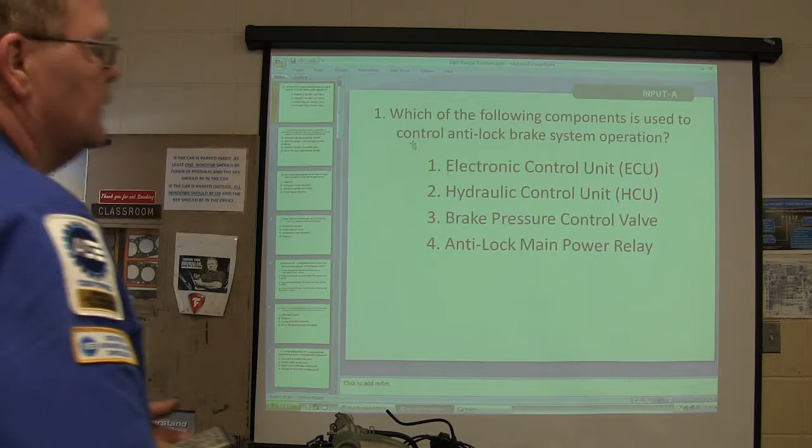Friday? Next Friday? This coming Friday? Yeah. All right, let's see what we can do here.

See how you guys are gonna do on this test. Now, we've already talked a little bit about ABS, so you shouldn't really have a problem with this. You ought to be able to blow right through it without a bit of a problem at all.

Which of the following components is used to control anti-lock brake system operation? Think about it, answer the question, and don't whine, okay? Which of the following components is used to control anti-lock brake system operation? Electronic control unit, hydraulic control unit, brake pressure control valve, or the anti-lock main power relay? Now, if you were paying attention during the previous discussions we had about ABS, you would know these.

I think you mean A, B, C, D instead of 1, 2, 3, 4? Either way works, you know how to make it happen. You got that answer sheet says A, B, C, D, you know, so.

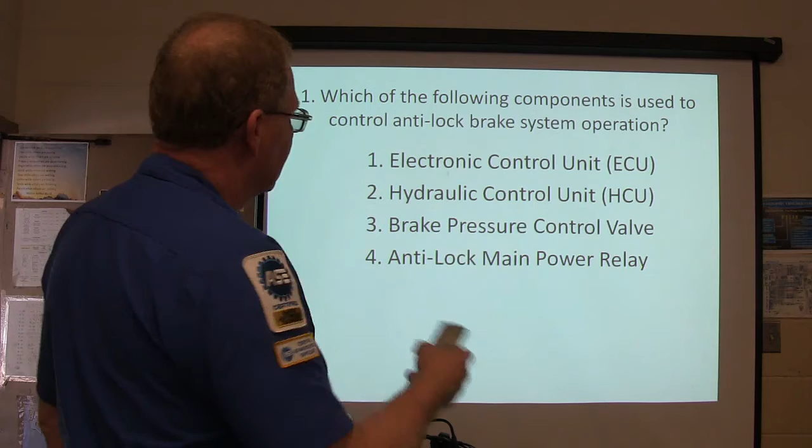All right, an anti-lock brake system prevents wheel lockup by controlling the brake pressure during an emergency stop. By not locking the wheels during hard braking, the driver can do what? A, maintain vehicle directional control. B, stop the vehicle in the shortest possible distance. C, maintain traction during the stop. Or D, all of the above answers are correct.

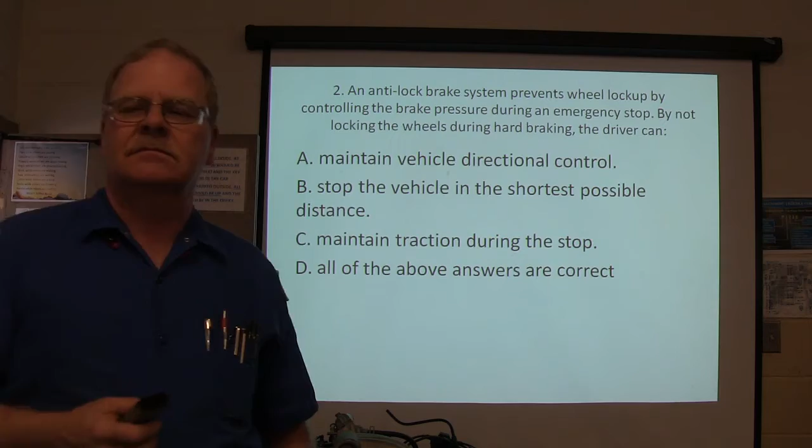We have people that came without pens today, and they have to pass a pen back and forth. Never go to work without a pen. I'm a team player, sir, I share.

When the brakes are applied hard enough to cause a lockup situation, the ECU sends signals to what? The reservoir, the pump and motor assembly, the hydraulic control unit, or wheel speed sensors.

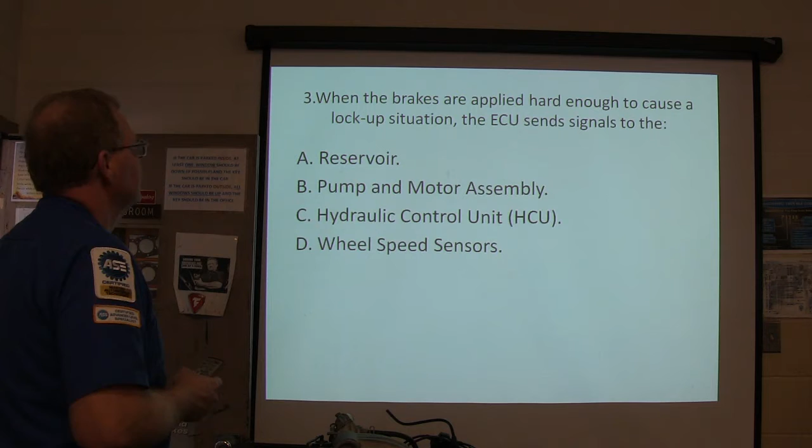Which ABS component is used to cut off fluid flow from the master cylinder to the brake? Outlet dump valve, inlet isolation valve, pump and motor assembly, or reservoir?

Are you a clear thinker? You said.

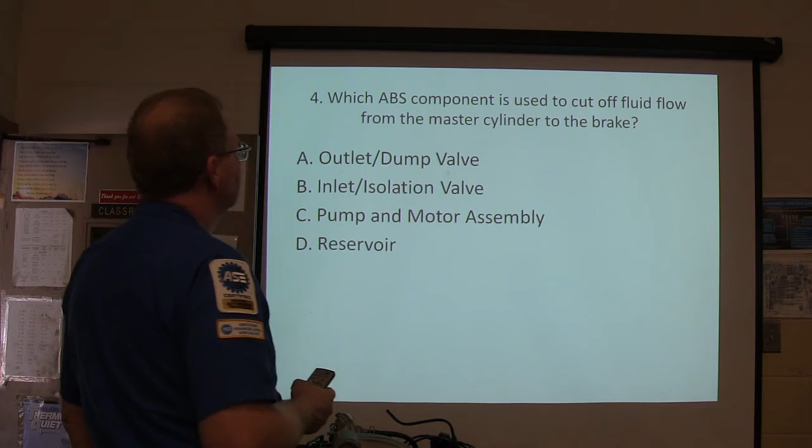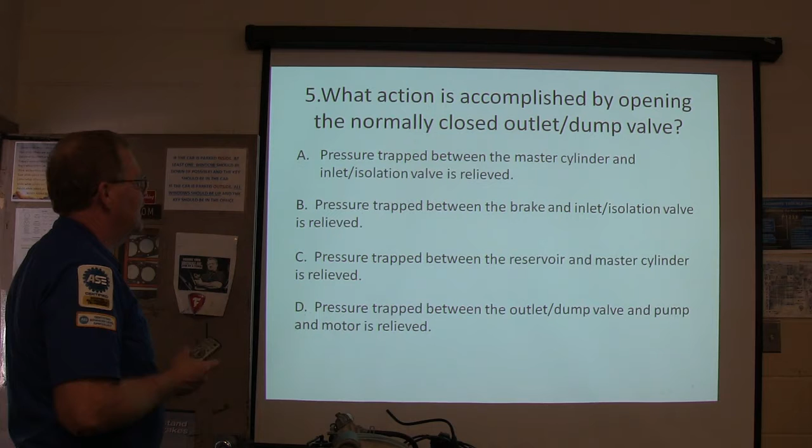What action is accomplished by opening the normally closed outlet/dump valve? Pressure trapped between the master cylinder and inlet isolation valve is relieved. Pressure trapped between the brake and inlet isolation valve is relieved. Pressure trapped between the reservoir and the master cylinder is relieved. Or pressure trapped between the outlet dump valve and pump motor is relieved.

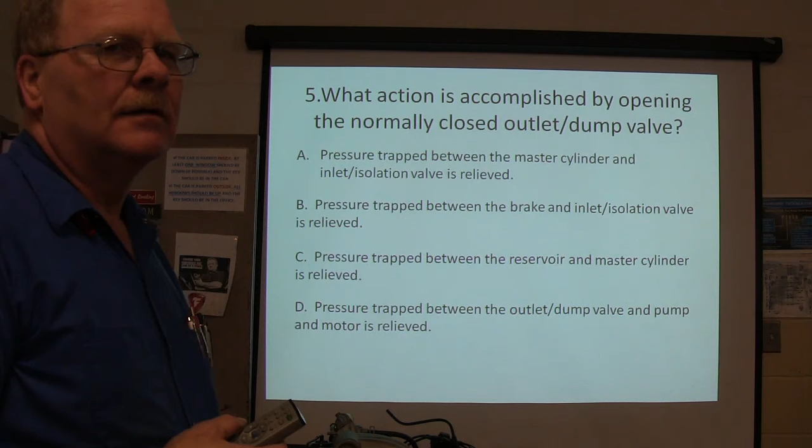That's confusing. Yeah, it is.

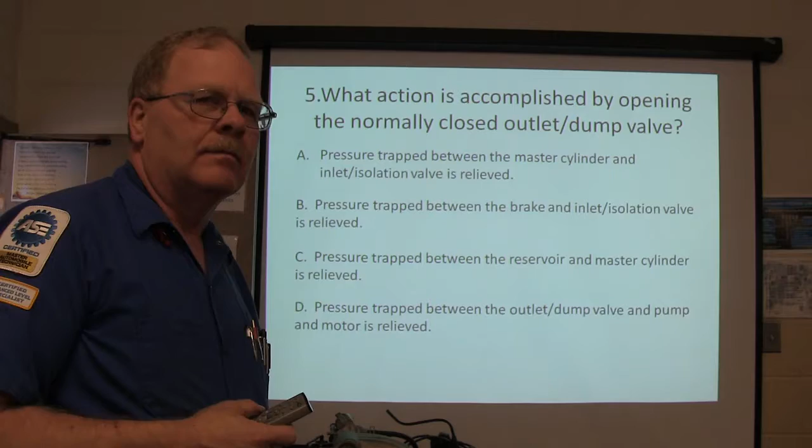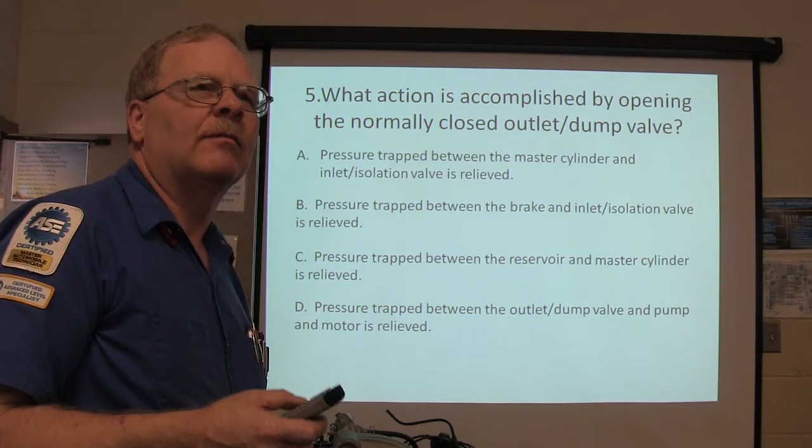I took the ASE brakes test this time around again, don't be scared for me. The fourth time. Over the past 25 years I took it, oh heck, I guess this is the fifth time, because I've re-upped. No, I've re-upped 4 times after I took it once. But anyway, this is a cakewalk. Okay, I didn't get this from the ASE test because you're not allowed to, right?

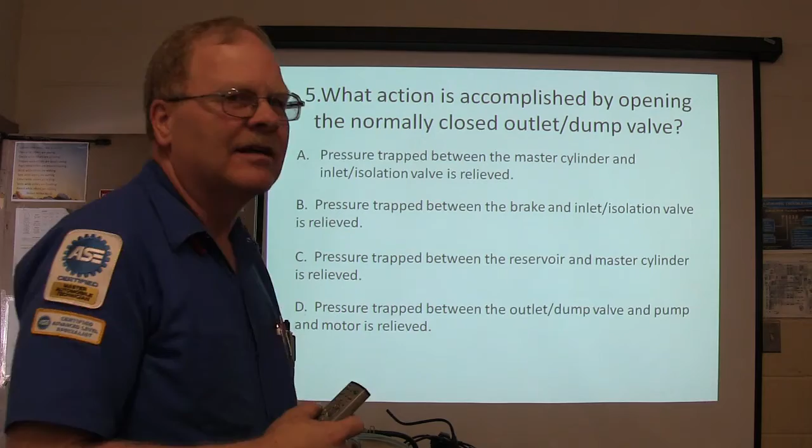But anyway, which of the following components are used to replenish the brake fluid in the ABS circuits after a dump occurs? Pedal switch, reservoir, pump and motor assembly.

Now, I didn't write these questions, they came from somewhere else. So if you disagree with any of these, we'll just have to take it up with the person who wrote it. I disagree with that one. I do too. I disagree with that question. You resemble that remark? Okay.

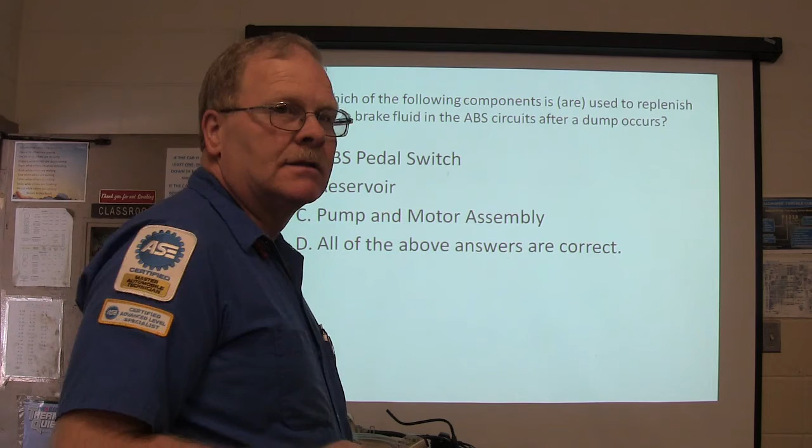Ready? Which ABS component is responsible for actuating pump and motor assembly operations? What do you think?

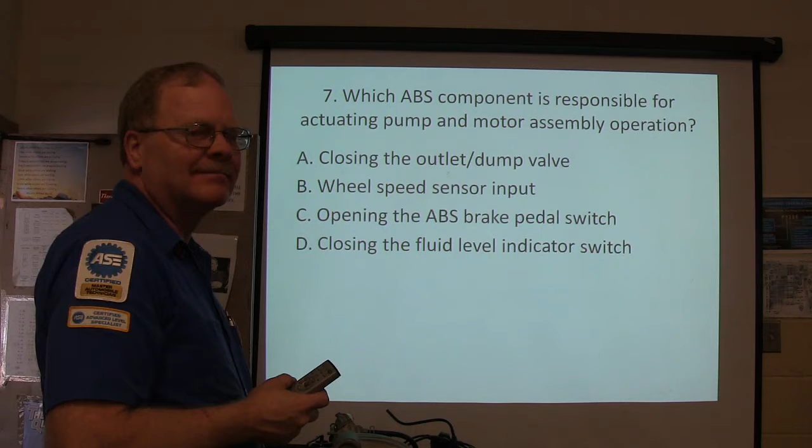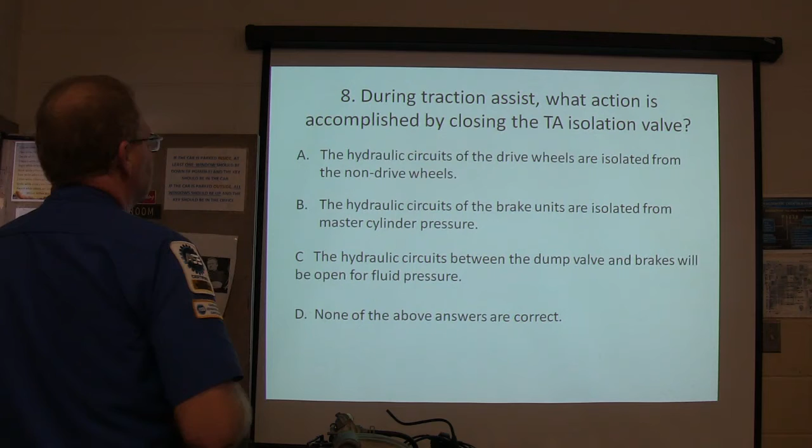During traction assist, what action is accomplished by closing the traction assist isolation valve? The hydraulic circuits of the drive wheels are isolated from the non-drive wheels. Hydraulic circuits of brake units are isolated from the master cylinder pressure. The hydraulic circuits between the dump valve and the brakes will be open for fluid pressure. Or D, none of the above answers are correct.

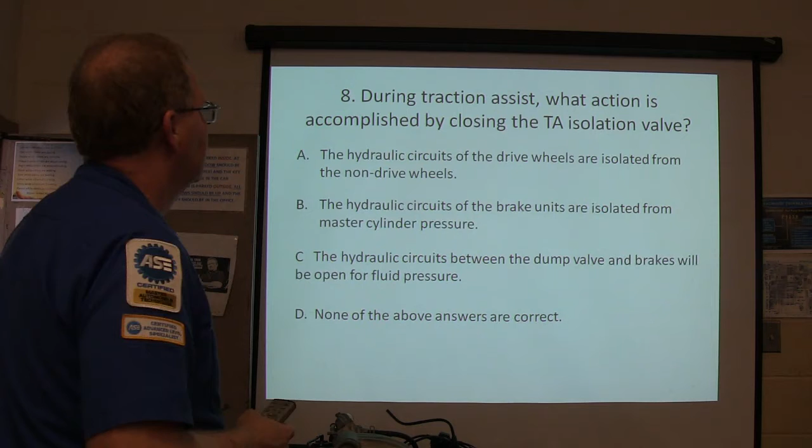Ready to move on? On most vehicles, when the brake fluid reservoir fluid level switch is activated: A, the red brake light is illuminated. B, the yellow brake light is illuminated. C, the ABS system goes offline. Or D, all of the above are correct.

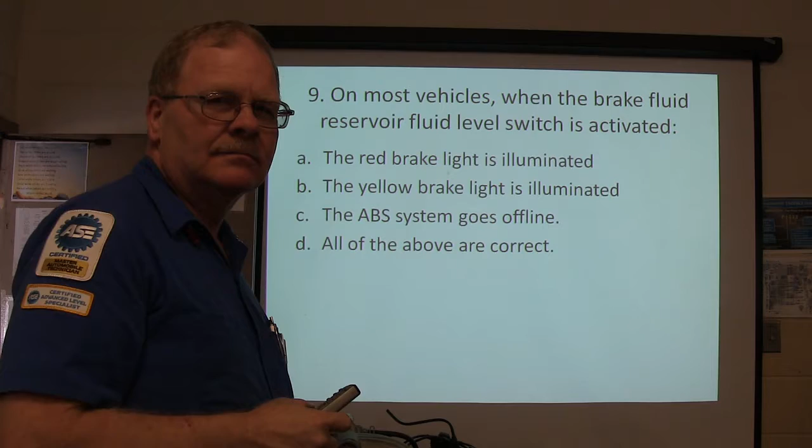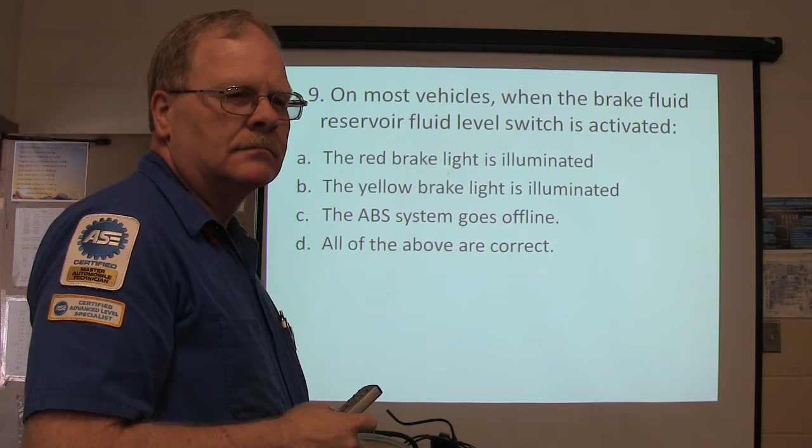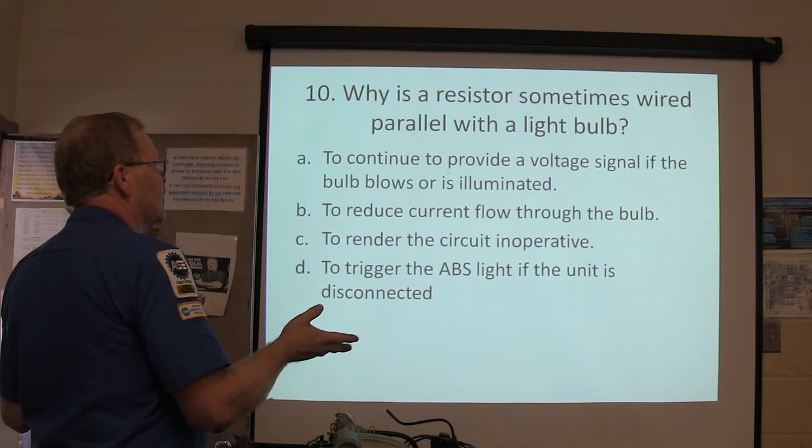Why is a resistor sometimes wired parallel with a light bulb? To continue to provide a voltage signal if the bulb burns out, to reduce current flow through the bulb, to render the circuit inoperative, or to trigger the ABS light if the unit is disconnected.

Oh, this test is going so horribly.

Yeah, he didn't bring a pen either, so he had to use my Sharpie. I got that, that's my Sharpie. Oh, okay, it's your Sharpie. It looks like mine from here. My Sharpie looks just like that one. Just a lot of Sharpies look the same. This is my shop Sharpie. The foreman accused me of taking a light bulb out of his drop light one time because the bulb I had in my light looked just like his. I ain't kidding, this was my Sharpie. Now wait a minute, we ain't done with this yet, one's mine.

Wow, pause for a war story. All right, you guys ready for the war story, right?

I'm ready. The truck, a Ford Ranger, nearly new at the time. This was a 97 model.

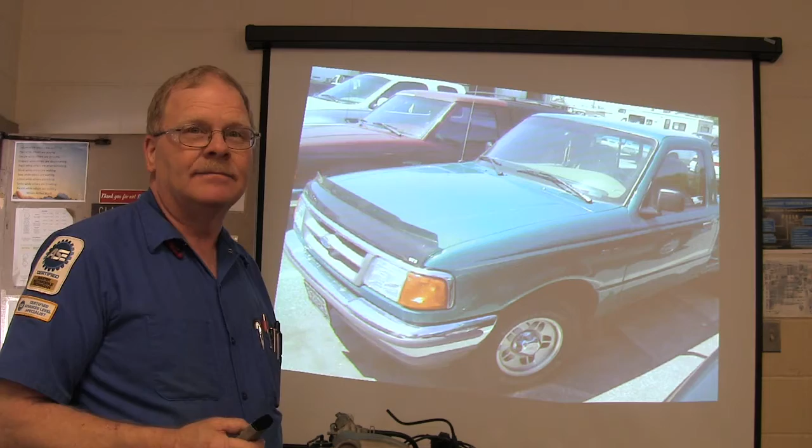This is how the rear anti-lock brakes are wired up on that particular truck. You got your keep alive memory fuse, and your diagnostic connector.

This goes to pin 12. This is your little module right here. This is your sensor, it goes between pins 10 and 3. And there's your RABS fuse, ignition switch, stop lamps right here. Got that?

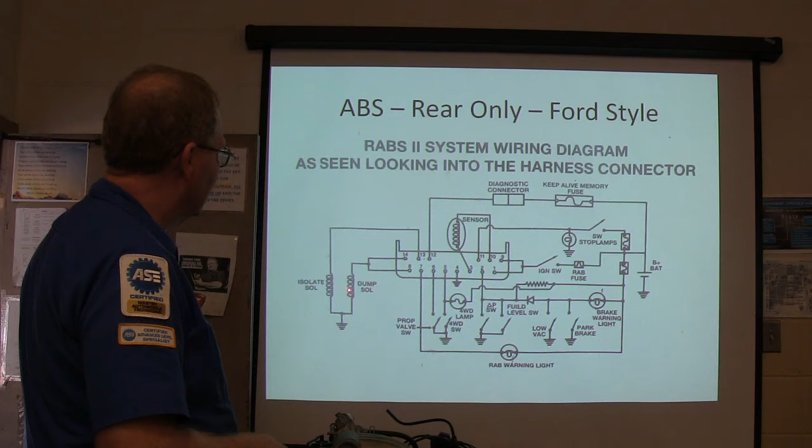And you got a resistor here, you got a diode, brake warning light, RAB warning light, 4-wheel drive light if you got it, so on and so forth. So there's your isolate solenoid, there's your dump solenoid. This is a fairly simple little system.

Now it became mandatory to have it on trucks and vans because they didn't want them spinning out on a curve, if you had to hit the brake when you're going around a slippery curve.

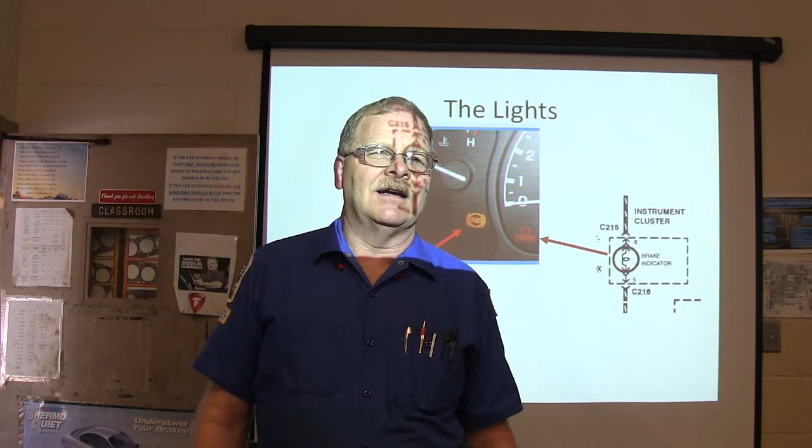All right, these lights came on. This guy comes in here with his truck into the write-up area and he says, my ABS light is on. Now, I got the ticket.

Well, I did not get the ticket, I'm sorry, I take that back. A guy named Keith got the ticket. And Keith had seen the reservoir go bad causing this before, because if the brake fluid goes low in the reservoir...

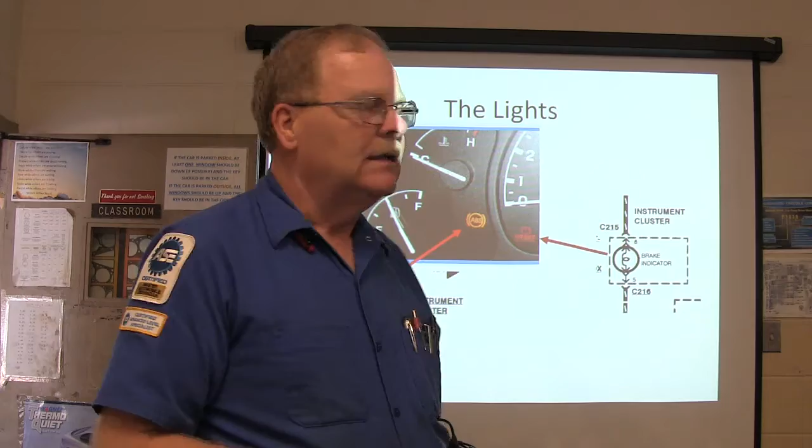...it turns on the red brake light, it shuts down the ABS. And it turns on both lights. And you'll get a code 12, I think it is. And so he got that code, and every time we ever seen that code, you just kind of get used to doing them all the same way.

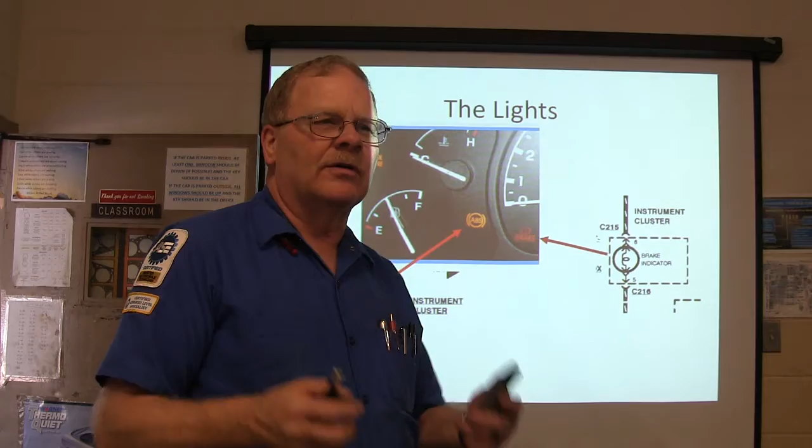He went ahead and cleared the code out and replaced the brake fluid reservoir. We'd replaced so many of them, they had them in stock because they had the switch built into it. And so here's your anti-lock brakes indicator, here's your instrument cluster.

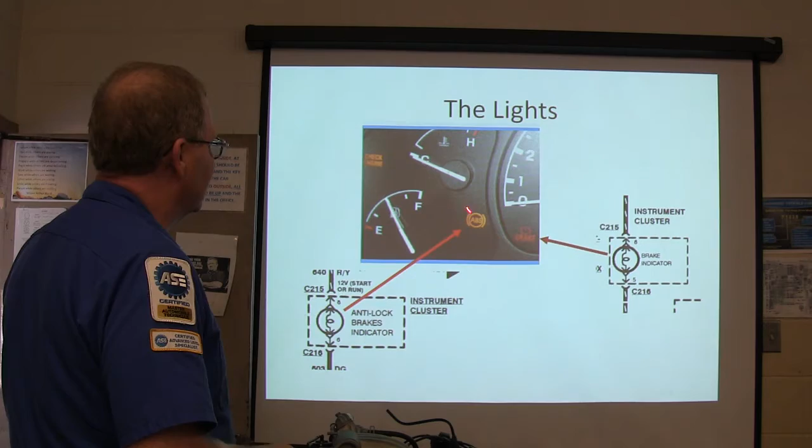And so the guy picked the vehicle up, drove around the front of the dealership, pulled right back in, and says, I'm still having the same problem.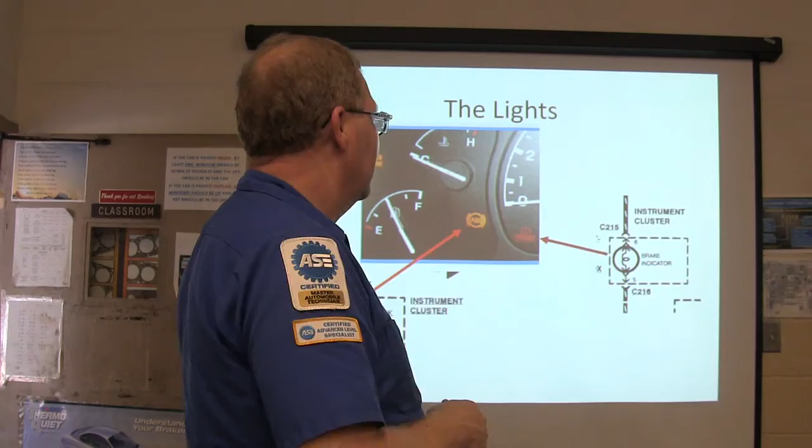You can pull fuse 9, or you gotta find the right fuse to pull, but you could just ground the cold side of the fuse. On some of the pickup trucks we got to where we knew which fuse to push and we would just mash the brake and it would start flashing codes.

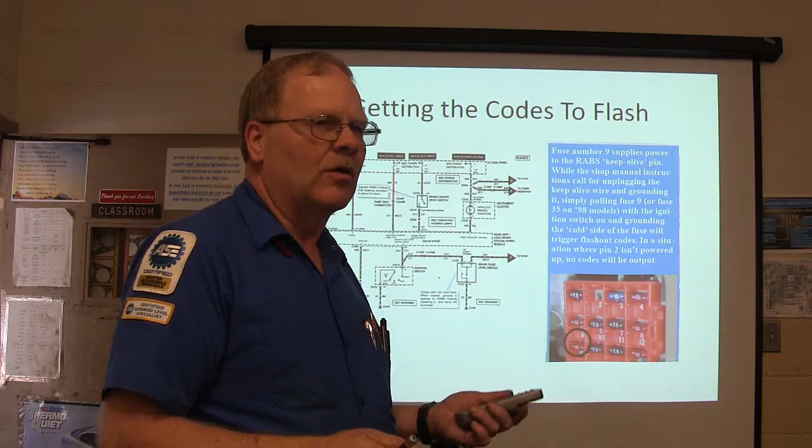If there's nothing wrong, it'll flash you a code 16. And all the codes from 16, they don't have a whole lot of codes, there's really 2 different codes it flashes out. This is sort of an overview of the way things work, you see the fluid level switch and all that.

All right, now this right here is what you're looking at. See the little, you got a black orange wire and you got a red wire plugged together. And if you unplug that one, you can basically just ground the cold side of that fuse.

If you unplug that fuse and put your test light in the ground and just touch that, you'll start seeing the codes flash out. Okay? So in a situation where pin 2 is not powered up, no codes will be output.

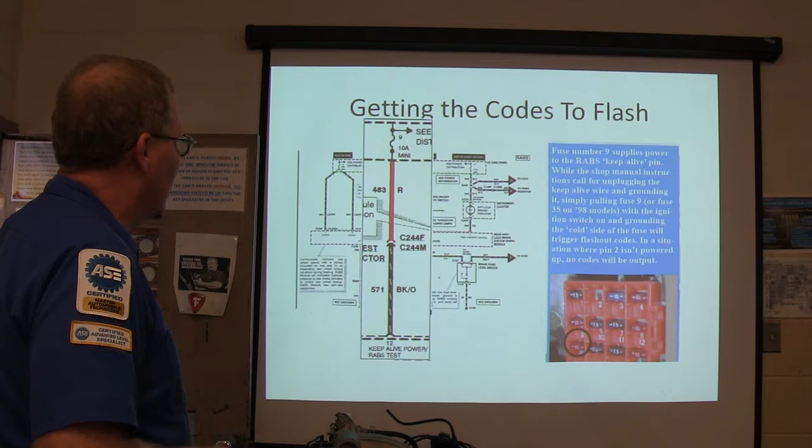So pin 2 going to the module keeps it from doing anything. The reservoir fluid level switch is a little more than a jumper, it provides power to pin 2 on the controller. If that connector is unplugged, the ABS lamp will come on, but the red brake lamp won't, because no ground is being provided for the red brake lamp.

But with the switch plugged in, the switch grounds the circuit when the fluid level drops to a predetermined level. That provides pin 2 with power, effectively shuts down the controller and illuminates the ABS lamp. Okay, that's what I was talking about.

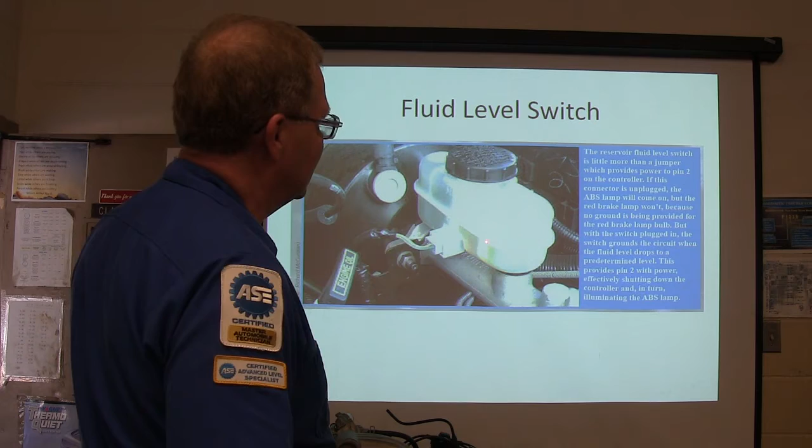This one here, when it goes low on fluid, it turns on the ABS light and shuts down the ABS. You still got your regular brakes though. All right, and this is kind of what it looks like right here.

See that, you basically got this little connector right here, and inside here, that's the way that switch looks. So basically, if it grounds that, it shuts down pin 2. See, there's pin 2, right there.

Okay, so this is basically, and this is going on over there. I'll show you a little bit more about that in a minute.

All right, so see over here, see F and F. This is from this connector, C137. It's going in here to the RABS resistor. There's your RABS diode, there's your brake indicator. You got that?

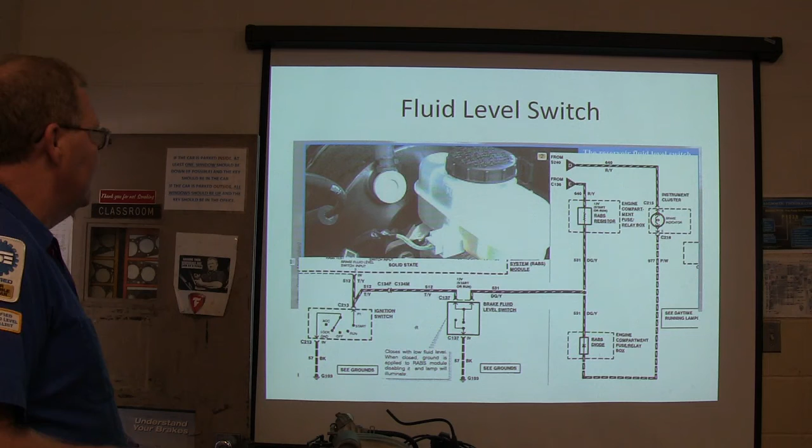All right, now then, so this is how I got that hooked together so you can see it. I got rid of that F and put it so it's right there. That's basically the way those schematics look. If you see F leaving this page and coming onto another page, that's how that operates.

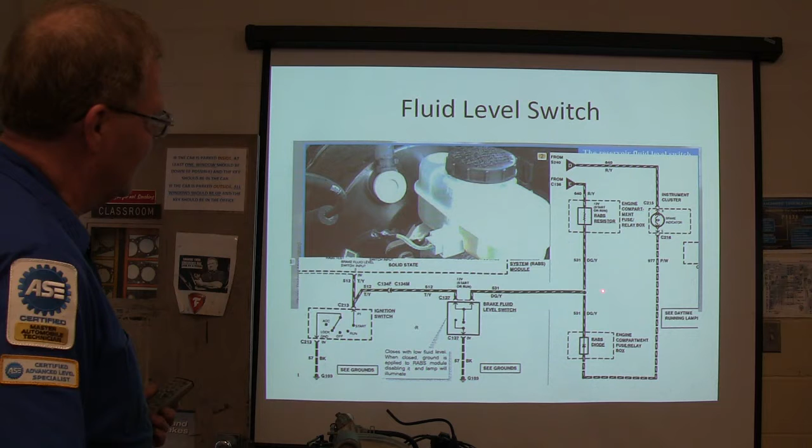All right, so let's figure this out. I would take a piece of wire, and you see these wires right here, a tan one, a green one, and a black one. The black one's the ground. The other two are the ones that are basically jumped together where this is plugged in and it's not low on fluid. So if I disconnect this and jump those two together and everything comes alive, I know I got a fluid level switch problem.

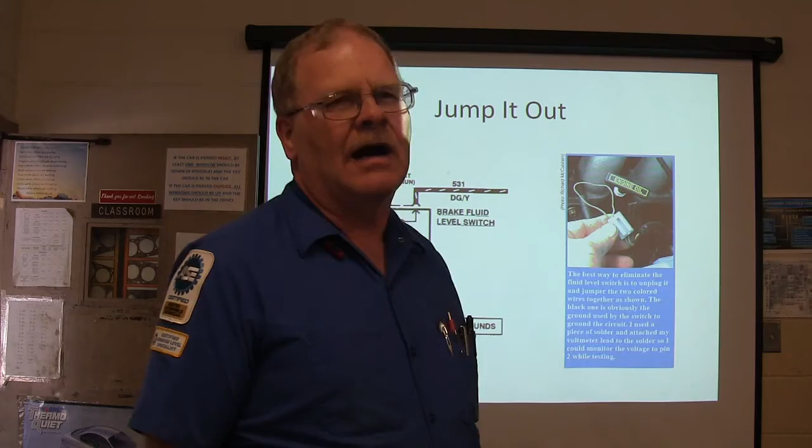Now, I don't know if Keith did this or not, but this was, you know, because it came back and nobody knew what to do, they threw it at me, which they'll be doing that to you one of these days.

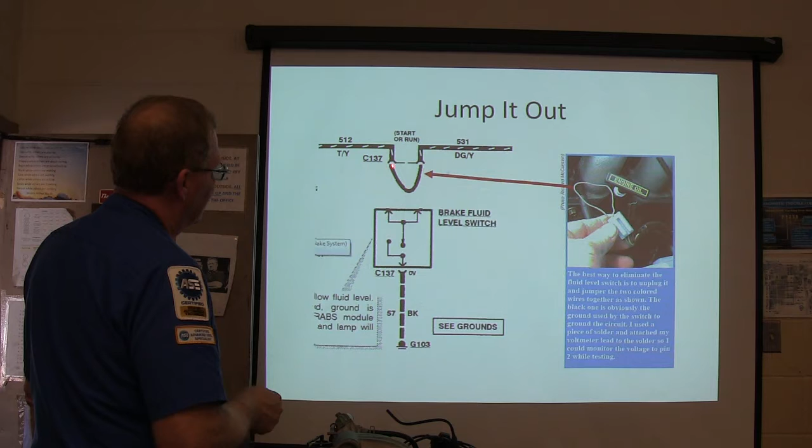Okay, so what you do, you unplug this. See how I jumpered that? I just duplicated what would be going on if this was out. That's what that jumper's like. Okay, now the RABS valve's got 4 wires leading to it.

On the Ranger we got out here, it's up there on the fender where it's easier to get to. This one here was down there on the frame. One of the power wires feeds the control solenoid; the other 2 are control solenoid wires used by the RABS module to control pressure of the rear brakes.

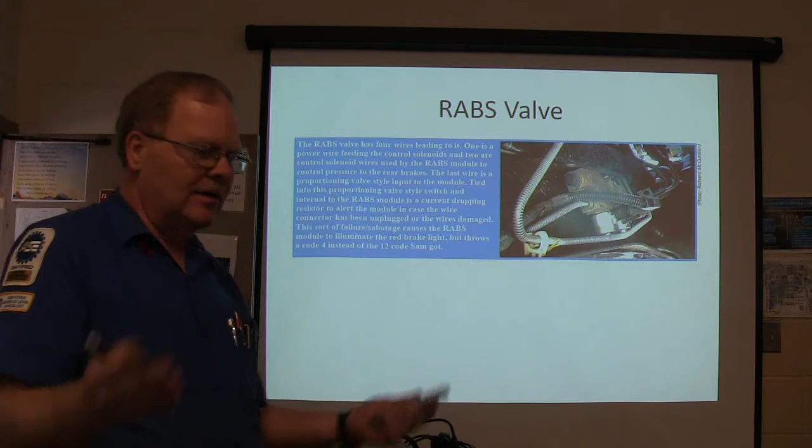The last wire is a proportioning valve style input to the module. What that means is if you've got low pressure in the front or the back, it actually moves a little thing and turns on the red brake light. There's an internal current-dropping resistor in the RABS module to alert the module in case the wire connector has been unplugged. So if you unplug these wires, it turns on the ABS light.

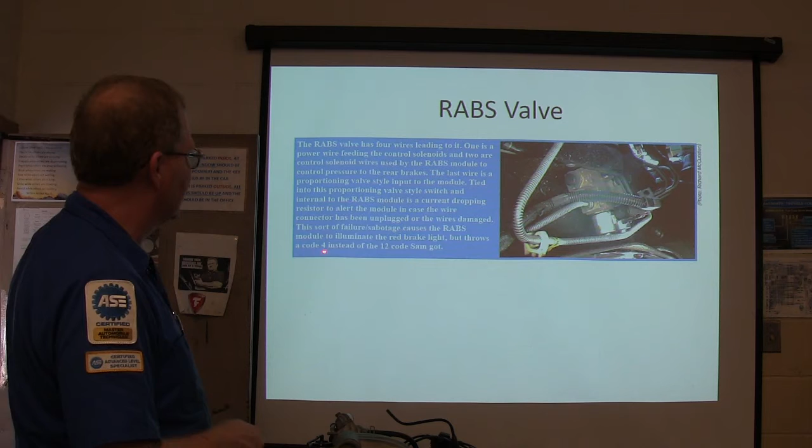The module doesn't like that. This sort of failure causes the RABS module to illuminate the red brake light, but it throws the code 4 instead of the 12 code. And I call the guy Sam, you know, whatever.

All right, this is kind of what we're looking at, a 22,000 ohm resistor right here. So there is actually a voltage that's fed out on this wire, right? There's 22,000 ohms, and I think that brings that 5 volts coming out of there down to like 1.9 volts or something like that. And I found out, when I was measuring that, I used to keep notes on all this stuff.

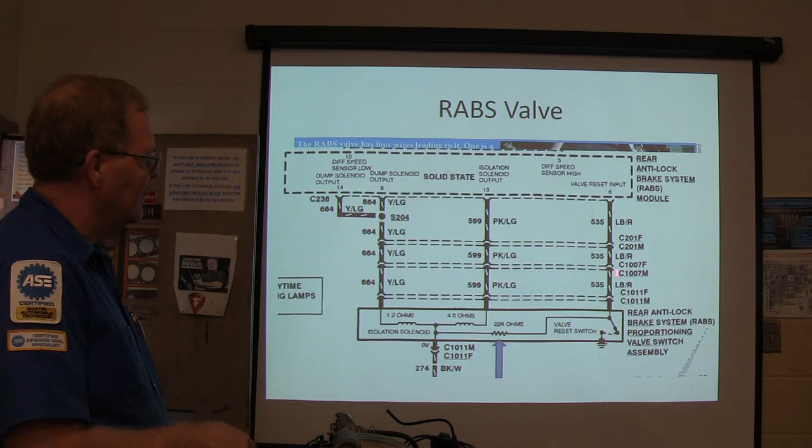You didn't see this in the book. I would measure it on a good truck and see what it would be, and then if I measured and didn't see the voltage I was looking for, I've actually replaced parts based on that. It's kind of like a fixed voltage. So when it shorts that out, you wind up with that 5 volts going to 0. But if you unplug it, same thing.

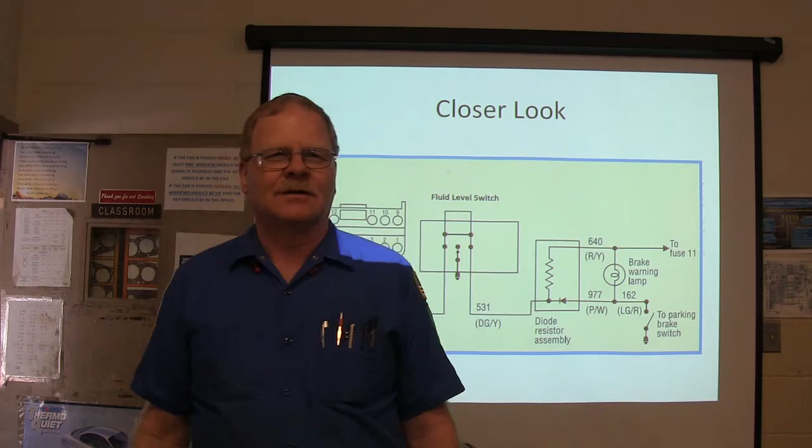All right, now let's look at it right here. We've got a fluid level switch right here. Here's pin 2. Remember, this guy came back in, and I'm going to tell you what happened. He said, when I mash the park brake, the yellow light comes on. The red light comes on there. Right after that, the yellow light will come on.

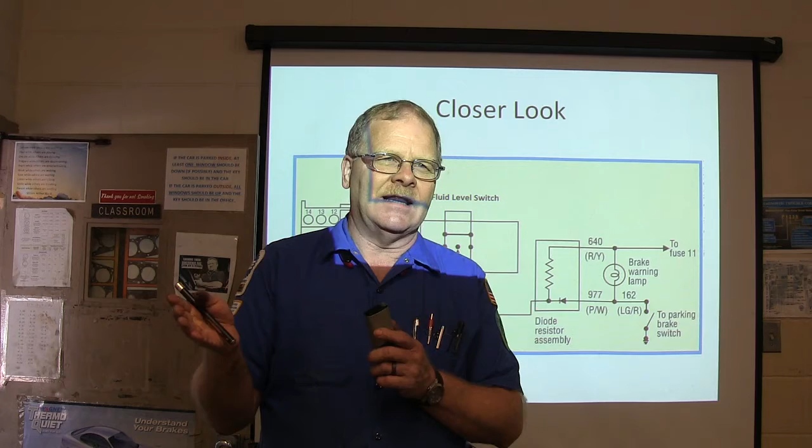Now, either the service writer didn't hear him say that, or didn't write it down, or he didn't explain it good enough, I don't know what happened. Of course, when I published this in the magazine, the service writer came out and fussed at me and said, hey, you made this sound like it was my fault. I said, yeah, I did, didn't I?

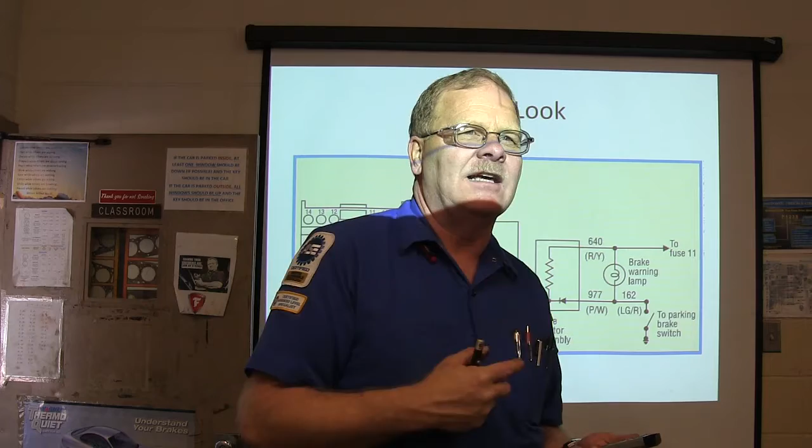Okay, all right, so basically what you got here, see fuse 11? Here's your brake warning light. Park brake switch does what? It grounds that, turns that light on.

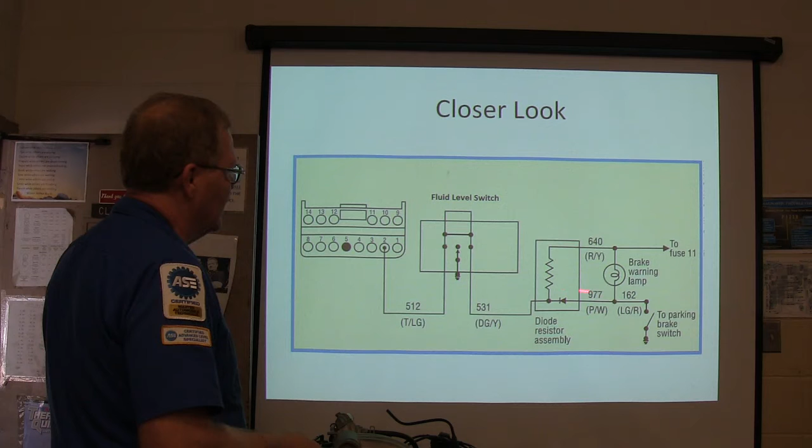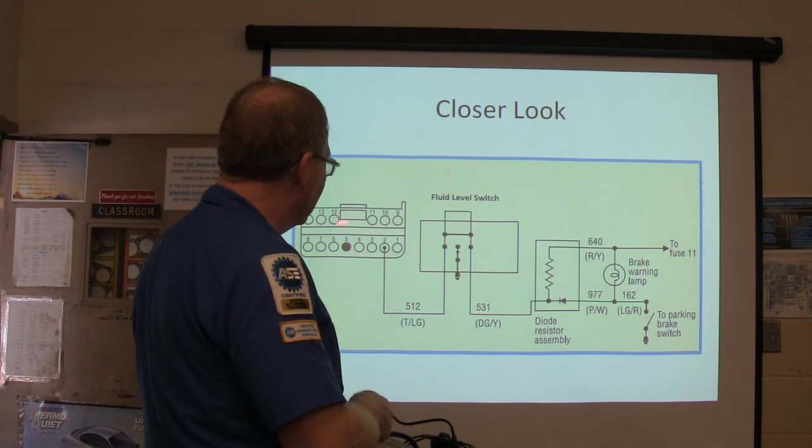And what we had on this one here was this resistor was bad, because this is actually supposed to keep feeding power to pin 2. But in this particular one, that bad resistor would cause pin 2 to lose its voltage when you engage the park brake. Red brake light would come on, and a second later, the other light, the orange one, would come on, because the module would have the idea that you had issues with the fluid level.

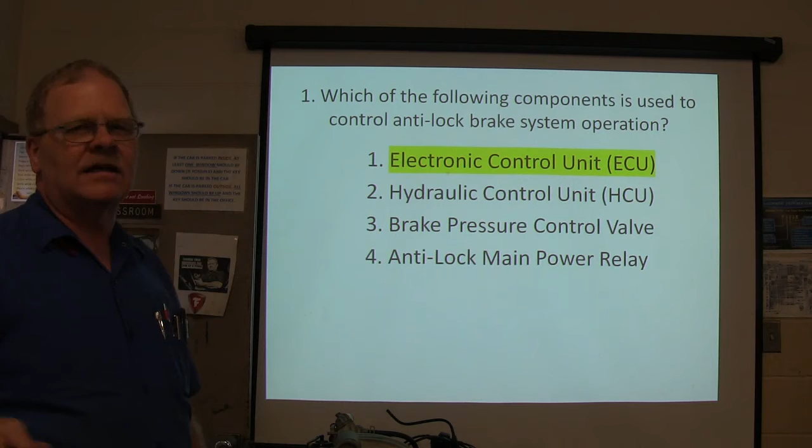All right, now then, have you got somebody else's paper? Swap paper with somebody else. Huh? You got them? All right.

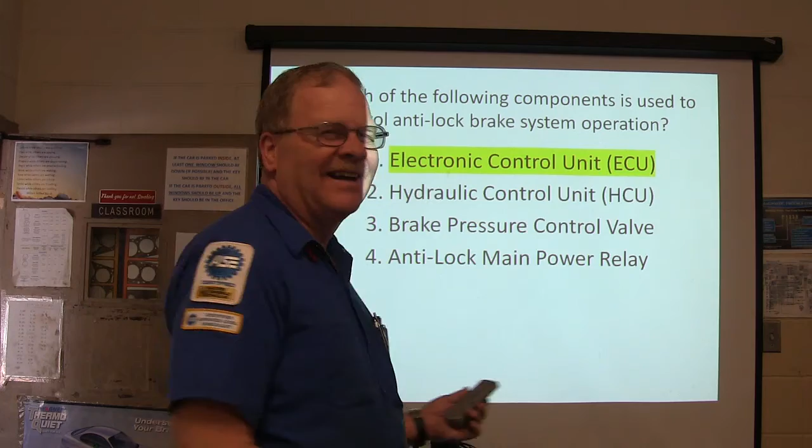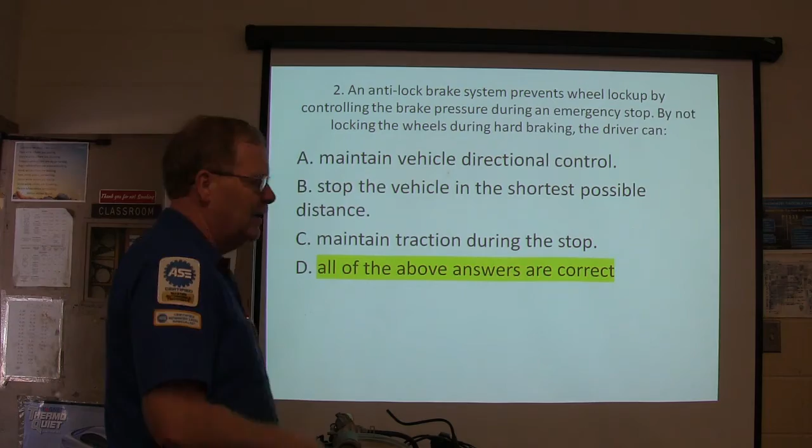On this one, ABS prevents wheel lockup by controlling the brake pressure during an emergency stop. What you got? Maintain vehicle directional control, stop the vehicle in the shortest possible distance, maintain traction during a stop. I'm telling you, if you ever drive one and hit the brakes and the wheels lock up, if you ain't got ABS, it feels like it picks up speed, man.

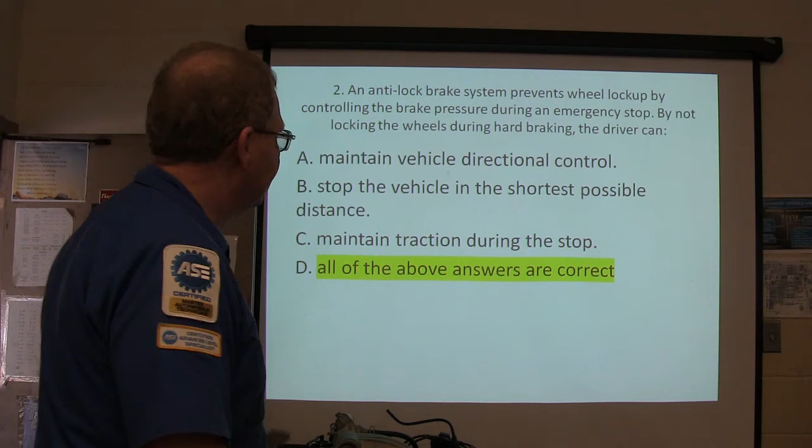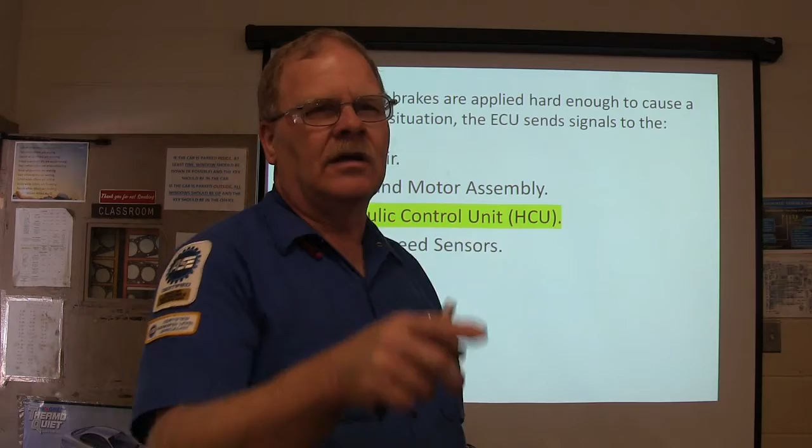It'll scare the daylights out of you on wet pavement, or if you're on snow or something. When the brakes are applied hard enough to cause a lockup situation, the ECU sends signals to this. Get that one right? What do you think? Are you not having to mark any of those wrong? Somebody do that? Yeah, well, he knows it. Which ABS component is used to cut off fluid flow from the master cylinder to the brake?

Isolation valve. If you think about the words, you can make that happen. Every now and then I gotta give you guys a vocabulary word.

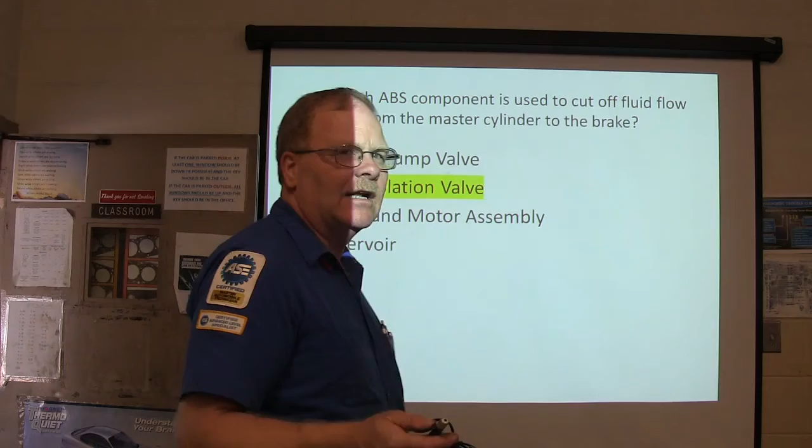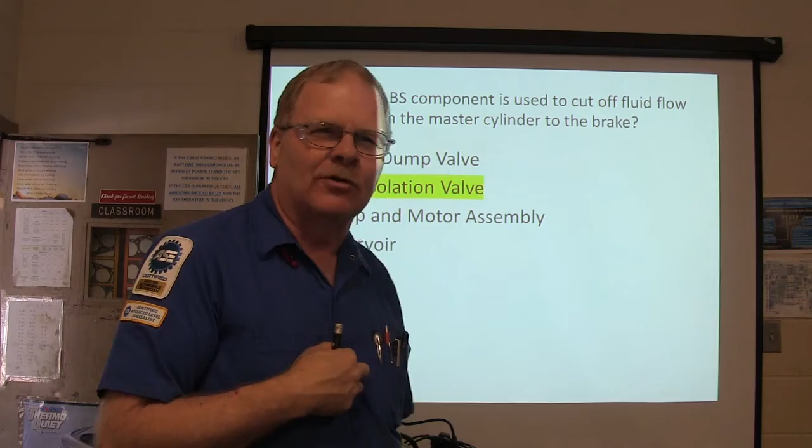You know what a succedaneum is? If somebody called you a succedaneum, what would that mean? No, it means you're a substitute. That's what a succedaneum is, a substitute. You got that? What if they called you a recalcitrant? Retarded, that means you're a bonehead that won't follow the rules. Close enough. You might call me a raconteur. That means I'm a teller of stories. Okay? All right.

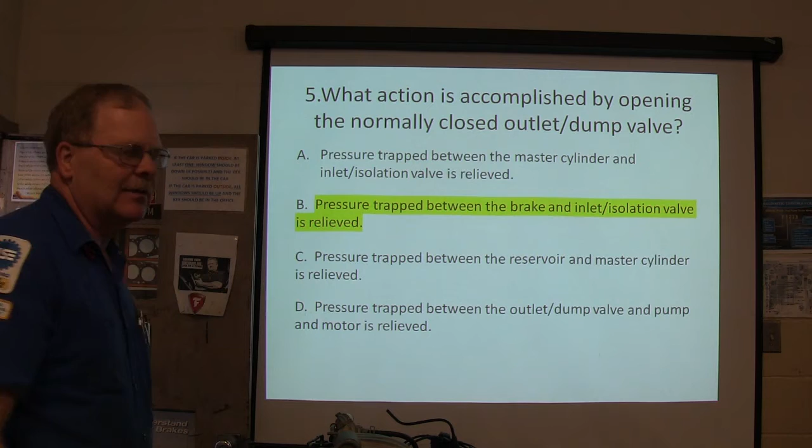What action is accomplished by opening the normally closed outlet dump valve? Pressure trapped between the brake and inlet isolation valve is relieved. Basically, what are you wanting to do? You're basically wanting to release that wheel and let it start rolling again, at least just briefly, right?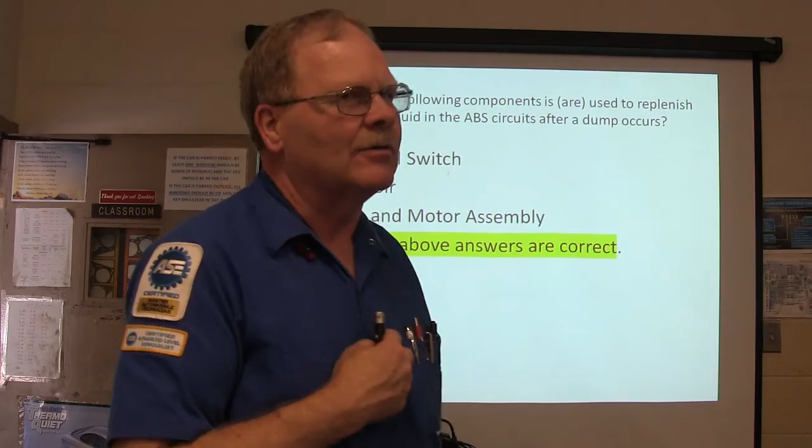Which of the following components are used to replenish the brake fluid in the ABS? Now this is a sort of a strange question. Like I said, I didn't write this question, and I'm going to tell you the truth, I would have probably bombed on this one. ABS pedal switch, reservoir, pump and motor assembly. I think this one right here, that's what the answer key had in the test I used to put this together. And I would say, wait a minute, I don't think it's this, and I don't think it's that.

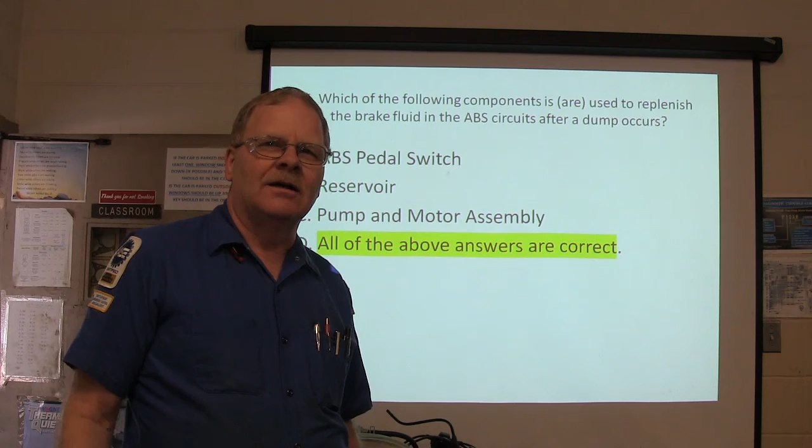I would put C. Did you put C? I put C. Who else put C? Anybody else put C? If you put C, I'm gonna give you that one, okay? Or if you put D, because that's what the answer key says, but I don't like that question, I don't like that answer, okay?

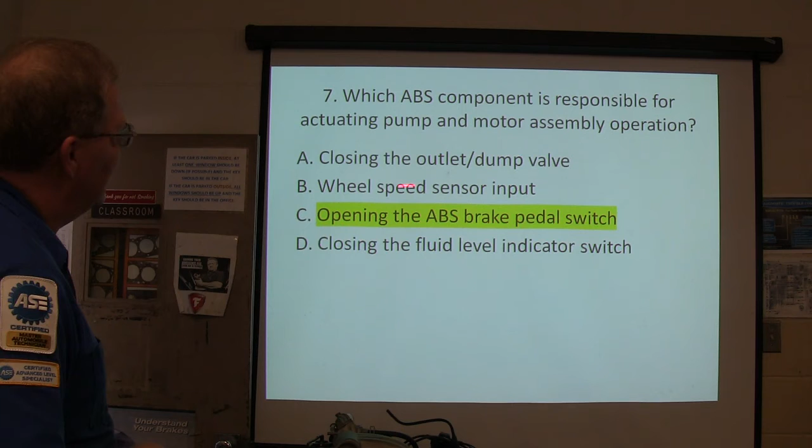Which ABS component is responsible for actuating pump and motor assembly operation? What do you think? If you close the fluid level indicator switch, is that gonna kick the pump and motor? Wheel speed sensor input? Closing the outlet dump valve? Which one's responsible? This one here, it's not asking you which one that is. Opening the ABS brake pedal switch, and what you're doing with your foot is gonna have a lot to do with everything, right?

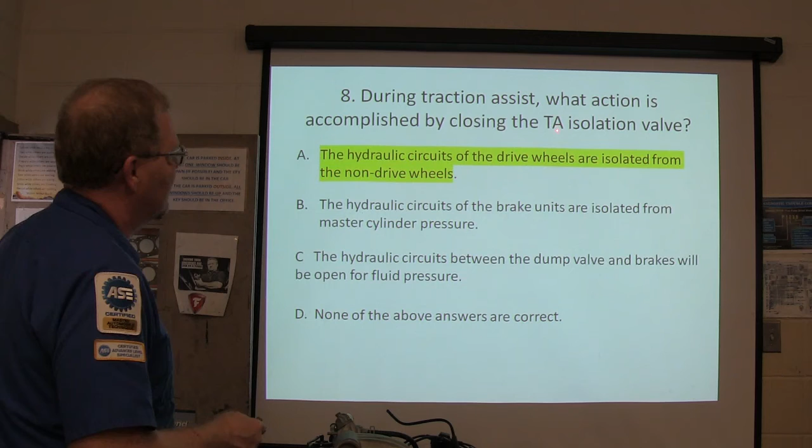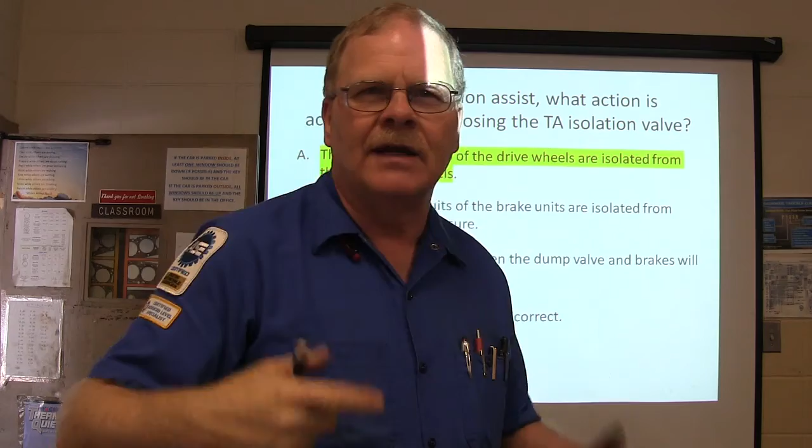So I'm not so sure I like the way these questions are answered, but we're gonna go with them anyway. During traction assist, what action is accomplished by closing the traction assist isolation valve? The hydraulic circuits of the drive wheels are isolated from the non-drive wheels. If you're gonna deliver some brake pressure to the wheel that's spinning and force torque to go to the other wheel, would it be advantageous to put pressure at some of the wheels that aren't being driven too? That is going to cause you to sit there and spin and cause all kinds of grief, right? You don't really want that.

So, on most vehicles, when the brake fluid reservoir level switch is activated: red brake light illuminated, yellow brake light illuminated, the ABS system goes offline. Who put a D on that? I realized after you told that war story, I got it wrong. Yeah, so that was the reason for doing the war story.

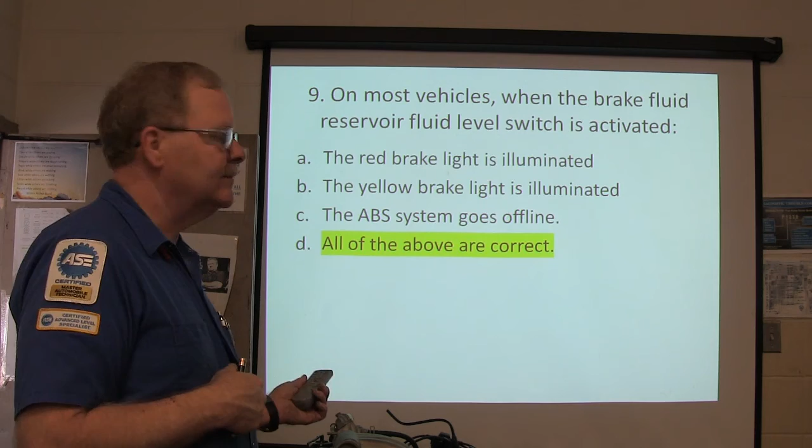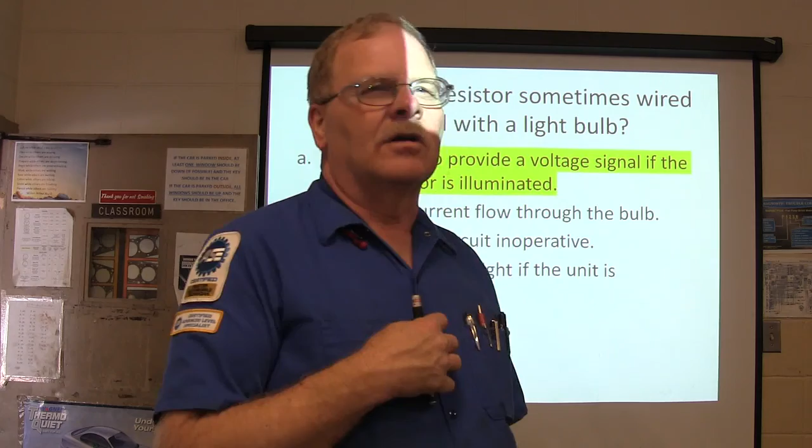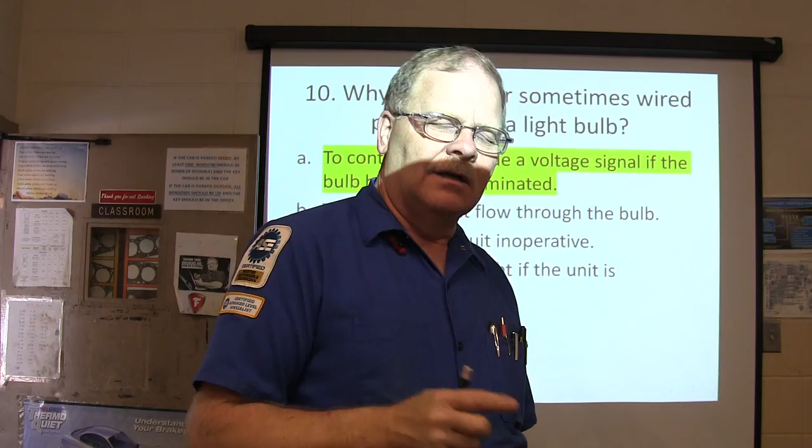Why is a resistor sometimes wired in parallel with a bulb, to continue to provide a voltage signal if the bulb blows or is illuminated? You're also going to see a resistor wired parallel with the charge light, the battery light, on the ones that are set up like that, unless PCMs control the alternator. Because whenever that bulb blows, they don't want you to lose your alternator output.

Okay, so don't raise your hand, but how many of you guys got all of them right? He raised his hand. Well, no.